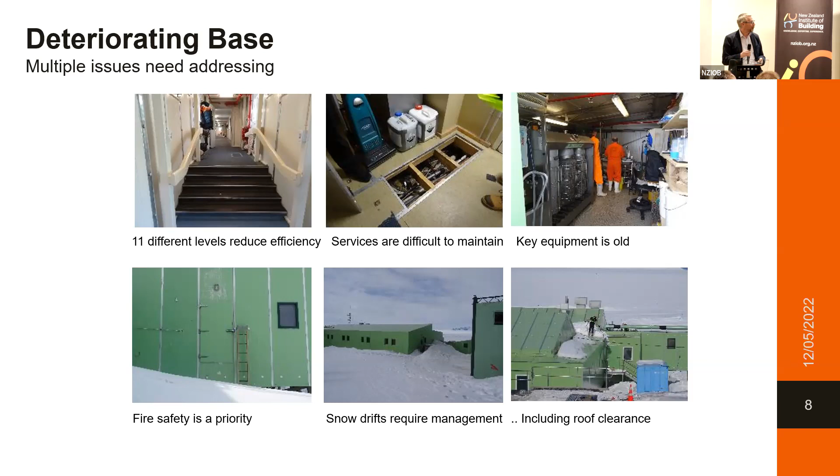And I'm going to hand over to Hugh now, who hopefully is going to be able to explain how he's designed that.

Thanks, John. What a pleasure it is to be amongst you all today. I flew in on Saturday, my first time back in New Zealand for just over 2 years. A lot of time on Zoom spent during those 2 years, and to be here actually in person with real people who are really going to build Scott Base is just totally awesome. Particularly great being here with John, Ian and Will, who are such incredible partners to this process.

The exciting bit's going to come a little bit later when Ian tells you how we're going to build it, and Will tells you what it's going to be built of. I'm just going to give you a quick architectural overview of how the building is arranged. As John has alluded, there's a lot of things go on at Scott Base.

A lot of science is carried out there. A lot of expeditions go out onto the ice. And it comes, despite being in Antarctica, with quite a number of significant challenges. In fact, you'd think, oh, well, Antarctica, there must be endless amounts of space in which you can build. There's actually quite a lot of restrictions around the current Scott Base.

For example, there's a road that leads from airfields to McMurdo Station, which pens in the site on one side. There's the sea on the other, which is frozen for most of the time, but defrosts sort of once every 2 or 3 years. And then there are long-term science experiments on the further side of this image. And then on the near side, there's staging areas for all the containers that are needed to bring in food and supplies and take out waste back to New Zealand. So actually the areas we have to build in are pretty restricted.

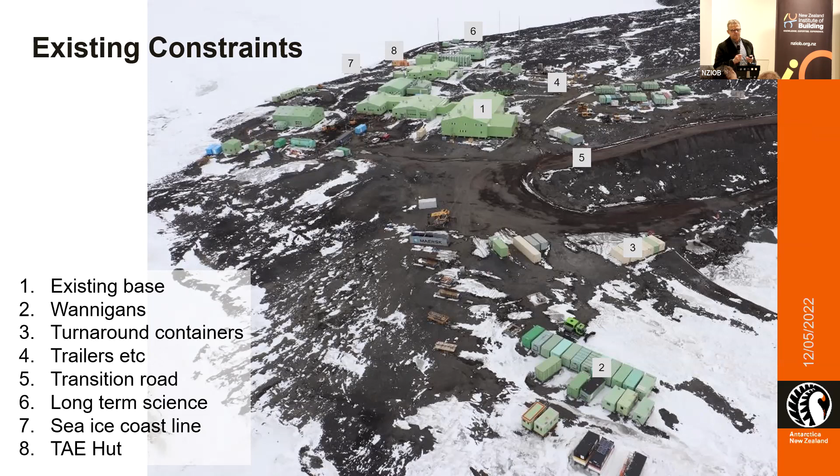Added to that, of course, there's an existing base, and we're looking to reuse that as accommodation, not only as we plan the building for the science teams who go out to Antarctica, but also for the construction team who will be building the new base. So, yep, in Antarctica, but almost like a city centre site.

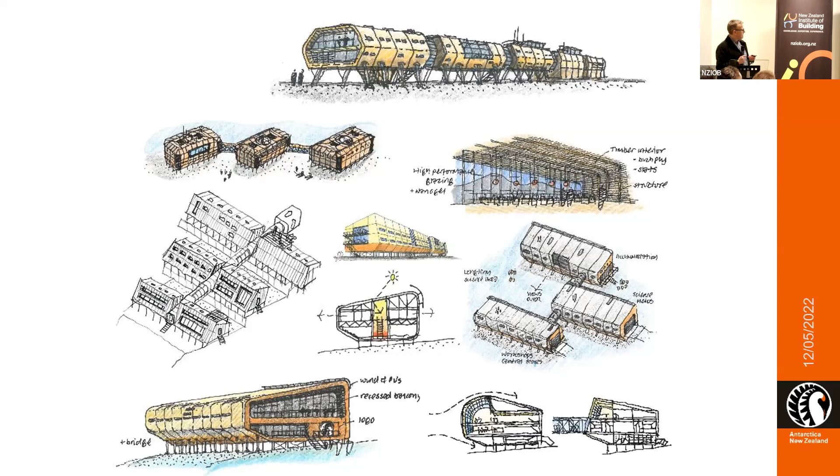So early on, we started coming up with concepts. Could the building be long and interconnected? Could it be a series of step buildings? And slowly, through a process of investigating different concepts, analyzing the benefits and disadvantages of each, we honed in on a solution which we've now been developing over the last 2 or 3 years. And the idea is really pretty simple.

Scott Base is located on Pram Point, where Sir Edmund Hillary established it in 1957. And it's a sloping site, sloping from Crater Hill down towards the sea. And because it's on that slope, we've utilized that in the design of the building. So there are 3 identical width buildings stepping down the slope of Pram Point and connected by bridges. So maintaining that concept of interconnection established by Hillary and reutilized in the buildings redeveloped in the 1980s, and which will also be a key feature of the new redevelopment.

So the upper building contains living accommodation, recreation and welcoming space. The middle building is the primary science facility. So that's where the scientists will be working, where there are labs, but also there's admin spaces and where all the expeditions are prepared for going out into the field. And the bottom building contains storage, workshops for looking after all the vehicles and so on that are needed to facilitate those expeditions.

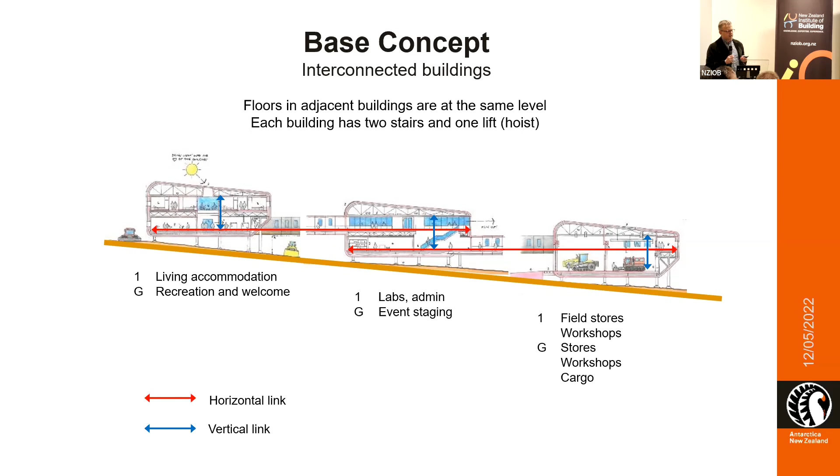They're connected by bridges so that the lower level of the upper building connects to the upper level of the middle building, and the lower level of the middle building connects to the upper level of the lower building. And then there are lifts and stairs making those connections, so the building becomes much easier to move equipment around compared to the 11 different levels of stairs which you find in the current base. And then with big zones for the distribution of services, again, addressing that issue which we have in the current Scott Base, where many of the services are reticulated in very tight zones that you need an army of 5-year-olds to help maintain.

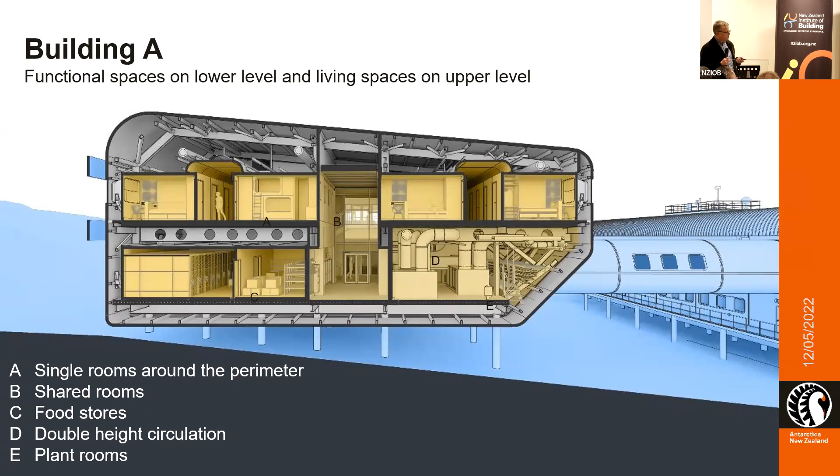So this is the entrance towards the building with the dining room up on the upper level so people can look out, engage with their incredible surroundings. As you come into the first building, which is the living and accommodation building, it's arranged around a kind of double height circulation space. So longer term residents have their own room looking out into the landscape. Short-term visitors, scientists going out into the field will share a room looking into this double height space. And on the lower level, that's where all the plant, food stores and so on are arranged. So quite a simple arrangement for carefully maintaining during the winter.

In terms of making the space seem as homely as possible, but also helping people cope with the effects of seasonal affective disorder, which is a big issue in the Antarctic in the winter darkness, we've employed a colour psychologist. We've been working with her recently, and she's developed a special Scott Base palette. And then we've been gently applying that through the building.

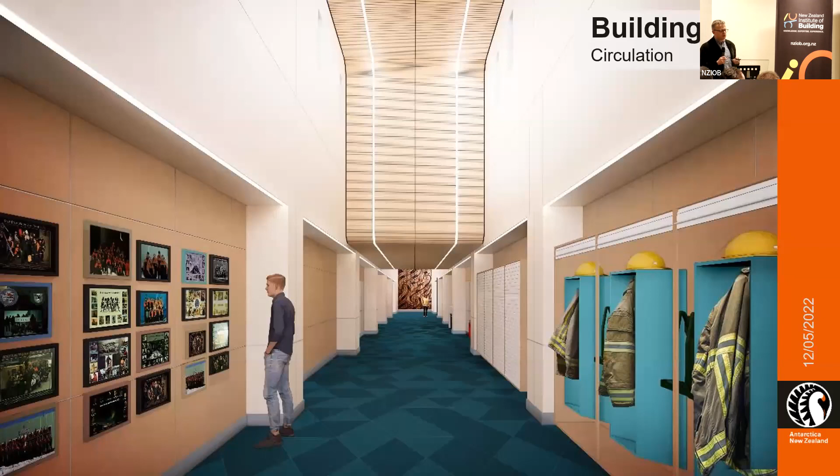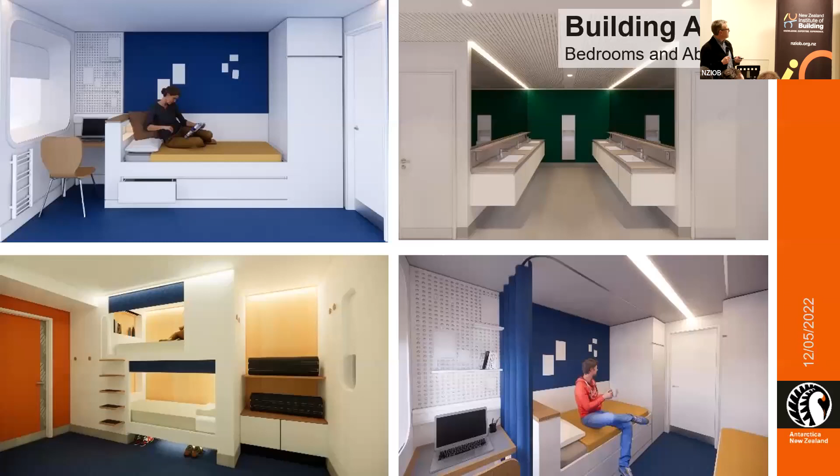So this is that double height circulation space. You can see photographs of all the winter teams on the left-hand side, and then some commissioned art piece at the end of that double height corridor, just again, giving that sense of place, which is going to be such a strong feature of the new Scott Base. And then just some of the other interior spaces, combinations of single rooms, twin rooms, quadruple rooms. You see the ablutions on the top right-hand there.

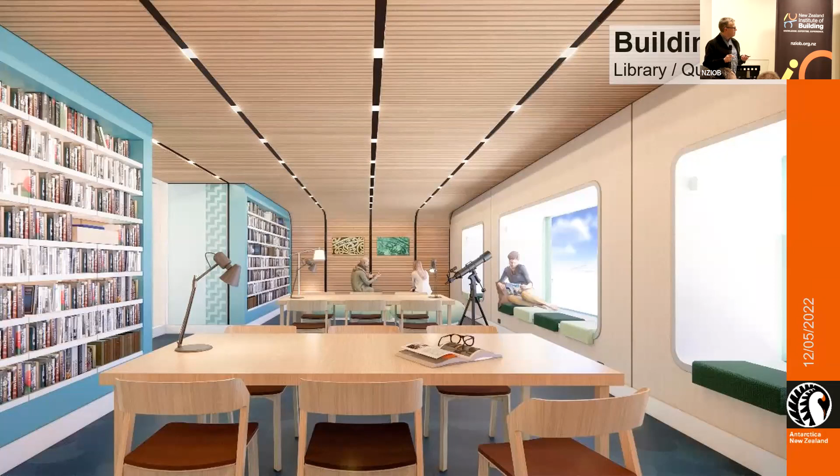And then this is a library at the far end of the upper level of that first living building with amazing views looking out over Mount Discovery. You know, really nice Southland Beech ceilings, quality furniture, books that come from Antarctica New Zealand's own collection, allowing people to constantly connect with their environment, as well as find out about some of the amazing science which has been conducted over the years at Scott Base.

Of course, no project would be safe without a little bit of value engineering. So with AECOM's great help, we've been going through that process recently. And I think one of the amazing things I found about this project is an incredible team. Antarctica New Zealand have done an amazing job at engendering a really strong team spirit. And, you know, I like to think, guys, I've made some lifelong friends through this process, which I think is something quite unusual, certainly in the construction industry in the UK. And it feels very special to be part of that on this project.

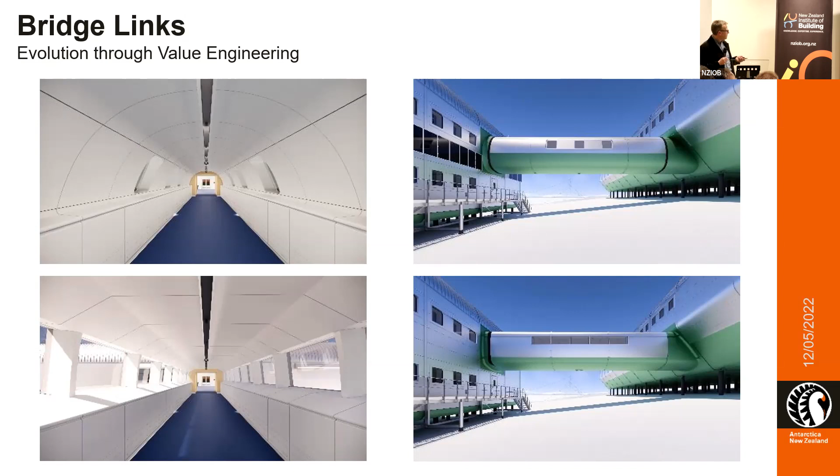And it's made things like this value engineering process so much easier to work through. And I think we've made some positive changes, which have also saved money through that process. One of which was just looking at our bridge link, which was a little complex in form, simplifying its shape, but then actually making it lighter and brighter in the process. The middle building is the one that's used for science. Again, flexibility is the key. Big open plan spaces to get expeditions ready, surrounded by cleaner spaces to calibrate things like electronics and other pieces of expensive experimental equipment.

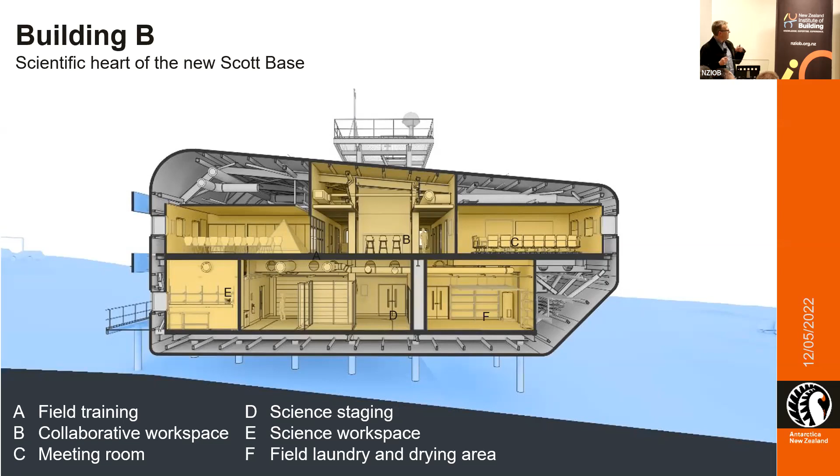Then with labs and open plan workspace on the upper level, and then a roof deck for people to put their experiments. And here you can see what that collaborative workspace would be like. And then the more industrial space for getting your expeditions ready at the lower level with cages, which can be reconfigured according to the size of the event, or the whole space can be open plan. It's all very regular shaped spaces with a repeating 6-meter grid, making it very flexible for future change.

And then down in the bottom building, building C, we're more into kind of workshops, storage. So you can see as a building, it's quite interesting because it ranges from sleeping accommodation, dining spaces and libraries, right the way through to vehicle workshops and wastewater treatment plants. So it's a sort of microcosm of a small community, I guess, with everything you need in order for people to survive through a long, harsh Antarctic winter.

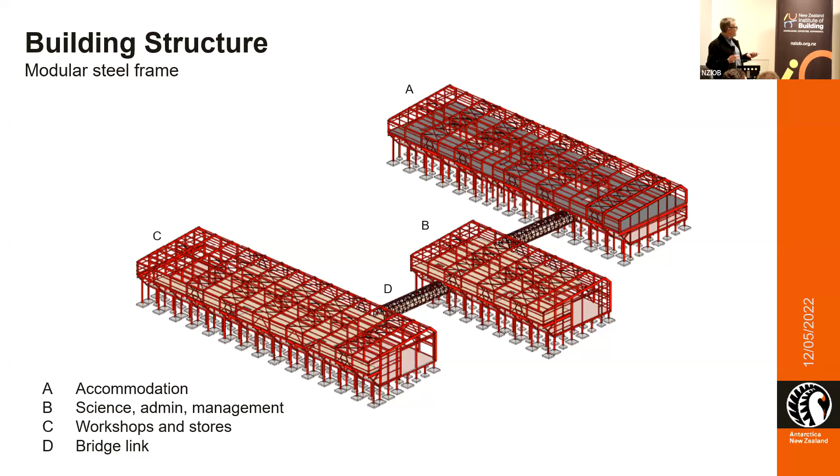And just finally, I thought I'd tell you about the cladding. Will's going to tell us about the structure, which is a repeating steel frame. Part of this project has involved really reaching out into the global community to find the absolute best expertise for ensuring that it's the design most fit for this extreme environment. So we went to Canada, for example, to look at how to minimize snow drifting around the base by elevating the buildings.

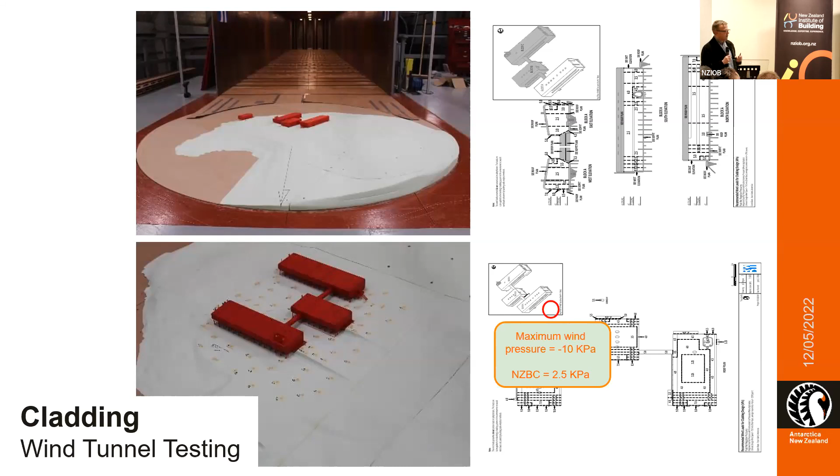We also went to some wind tunneling in the UK, where they built models of the building, put it through the wind tunnel, and we discovered that our maximum wind pressure is 10 kPa, induced by wind speeds of around 180 kilometers per hour. That's around 4 times more than is required to be withstood in the New Zealand building code. So you can tell in some places, this building is going to get an absolute hammering. So we really need to be careful in the way that we design that.

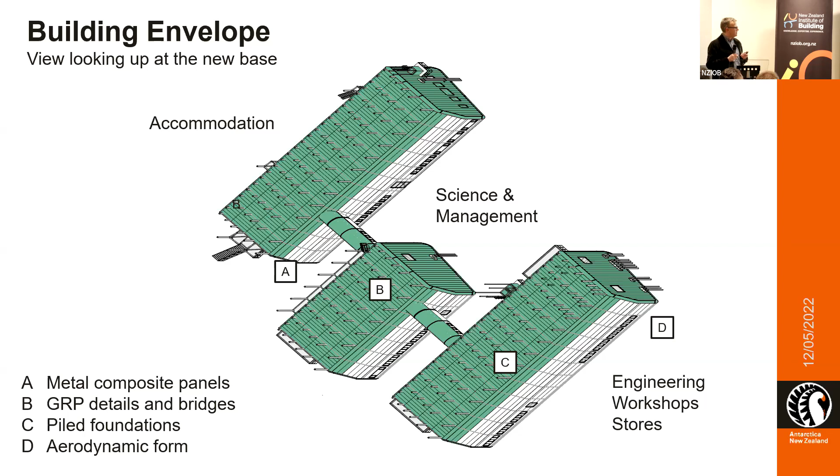Whoops, that's a bit of a weird image, slightly distorted, but looking up at it, what we're seeing here is a building largely clad in metal composite insulated panels, so a Kingspan type system, but then using high performance glass reinforced plastic details for those key points around the gable ends, which make sure that the wind pressures are not exerting too much of a force in the areas of highest pressure. So just helping to direct the wind around the building, keep the snowdrift down, and reduce the pressure on the building. So that's the architectural overview. How are we going to build it?

So this is pretty unique. In the planning of this, we looked at the traditional stick build method and thought it would take about 10 years by the time you have to containerize, build, and decommission. And aside from that, you would have needed a huge amount of people. And of course, there's not a great deal of accommodation at Scott Base. So that drove the methodology, which is a modular construction.

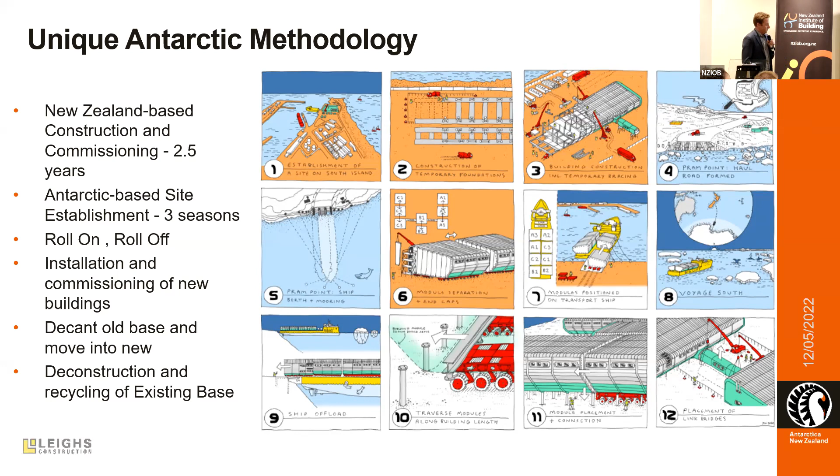So the Timaru construction, I'll call it standard. It's a reasonably complex building, as Hugh said. It's a small town, so it has everything you can imagine a town needs to run. Wastewater, reverse osmosis water production, fully reticulated services, quite a complex fire suppression system, and obviously bedrooms, kitchen, you name it, it's got it.

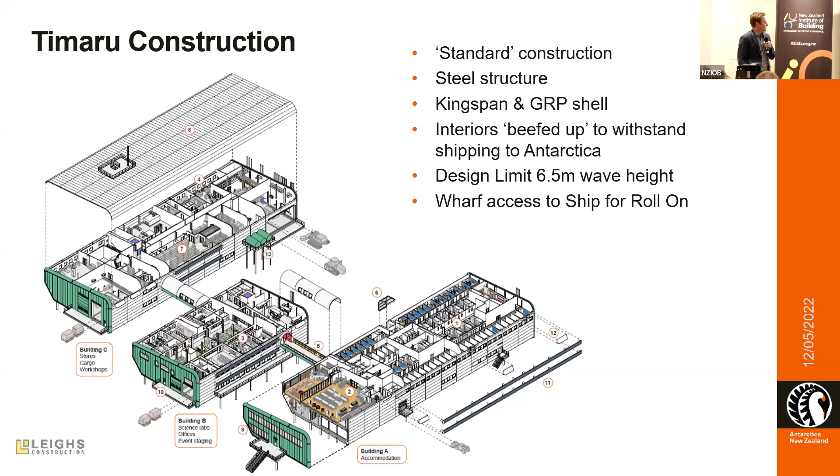We'll talk about the structure shortly, but it's a traditional build, but beefed up to withstand primarily the shipping case. So as it travels across the Southern Ocean, you can imagine there's going to be a lot of interesting forces at play on that structure. So we'll talk about that in detail after me. So a part of the Timaru-based construction is accessing a ship for the modular transportation. So the construction of a roll-on structure is required to do that.

So in parallel to the build in Timaru, there is about 3 years of site preparation to prepare the site ready to receive the modules. So part of this is obviously bulk earthworks. There's about 65,000 cubes of material, and we're balancing that out on the site so there's no material removed. Transition road, so, oops, damn it.

Temporary wharf and bollard construction. So we need to build a structure to receive the ship when it arrives, and that's a roll-on, roll-off structure. Quite a lot of bathymetry around, obviously making sure that the ship can actually get into that site. There's no underwater blasting allowed down there, so it'll be quite a complex piece of work to design that structure. And all through this, we've got to maintain current operations at Scott Base. So the staging aspect of this is pretty complex.

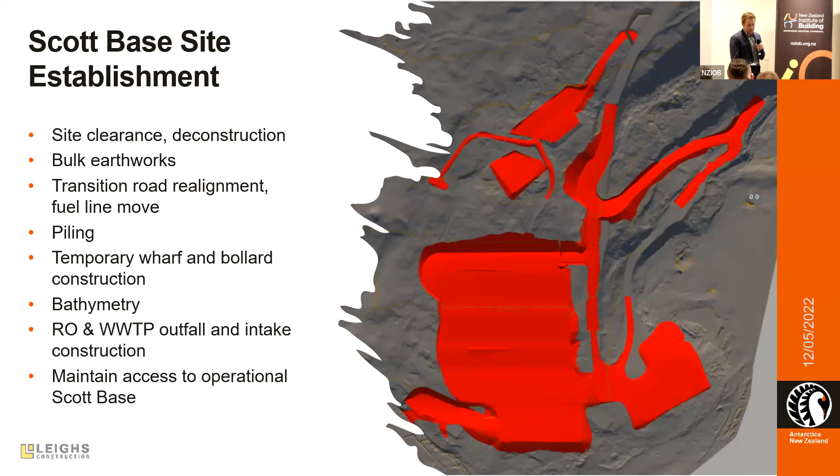The site access and mooring at Scott Base, as I mentioned, is quite a complex piece of work to make sure that the ship can obviously be kept fast in that position while the modules are rolled off. And amongst that, we've got sea ice. We'll talk about that in a little bit more detail later. And the Southern Ocean, the voyage. So as you know, the Southern Ocean is a wild stretch of water. And as such, there's been quite a lot of work done to model the movements of the ship. And we've used a lot of historic weather forecasting and information to backcast what the sea state may be at that time of year.

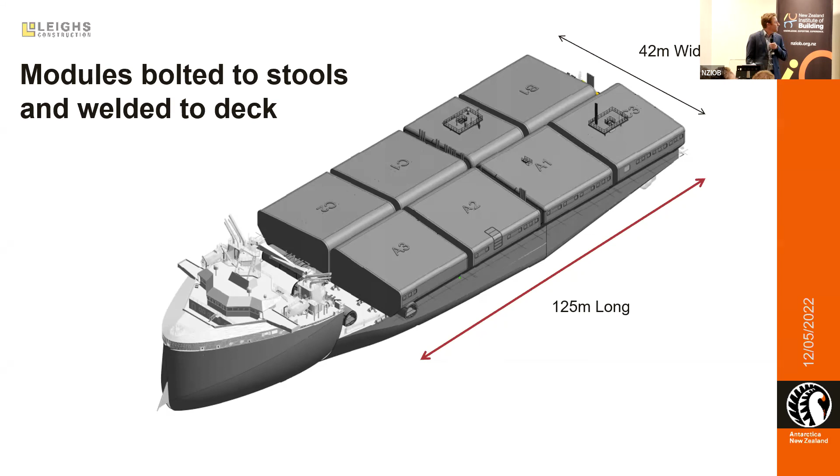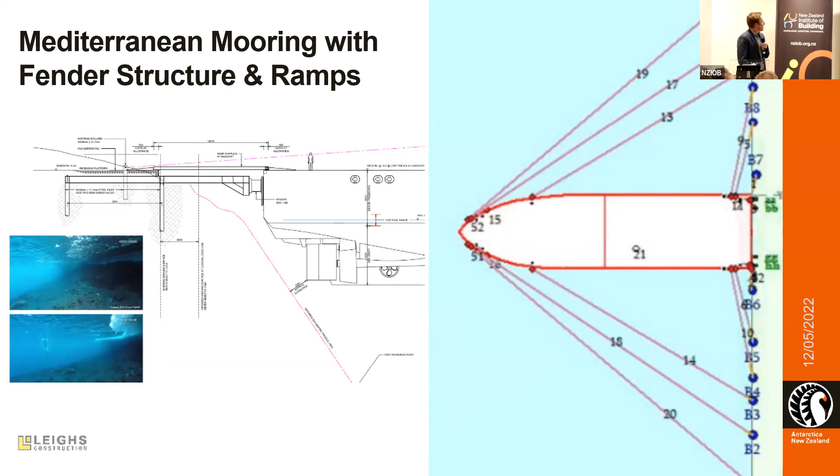So ice breaking is another piece of this puzzle. In order to get to Scott Base in the middle of summer, the sea ice is still there. So you need an icebreaker to break a channel, sometimes as long as 50 kilometres from the ice edge, depending on the sea ice conditions. But not only that, we can only arrive after a certain date. So the Weddell seal population happen to have a wonderful nursery right outside Scott Base. So we cannot, obviously, get an icebreaker in there until the pups are able to get out of the way, essentially. So that limits the arrival date. The sea ice conditions obviously dictate how long the breaker will need to break the channel.

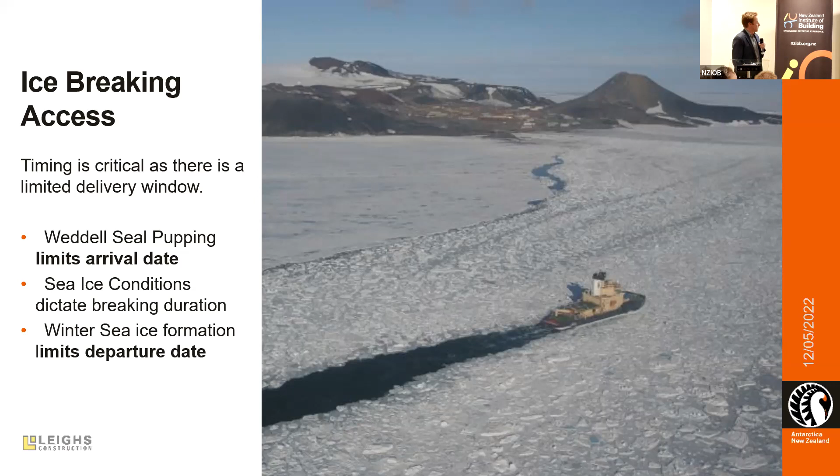So the modules in themselves are not that heavy, but they're obviously bulky. We've got quite a precise loading sequence, how we load them onto the vessel in order, obviously, to get them off in the right order. And the positioning on the piles, I think the next slide, no, it doesn't, it's later on. The positioning of the piles on which to place the modules is a precise piece of work as well.

So we're modelling about 1 module per day off the ship. It's a walking pace. It's on about a 9% grade. I think it's the steepest that these machines will go up. We've got a bunch of winch blocks as well to make sure that there's no issues for traction. So it's a really interesting piece of the project.

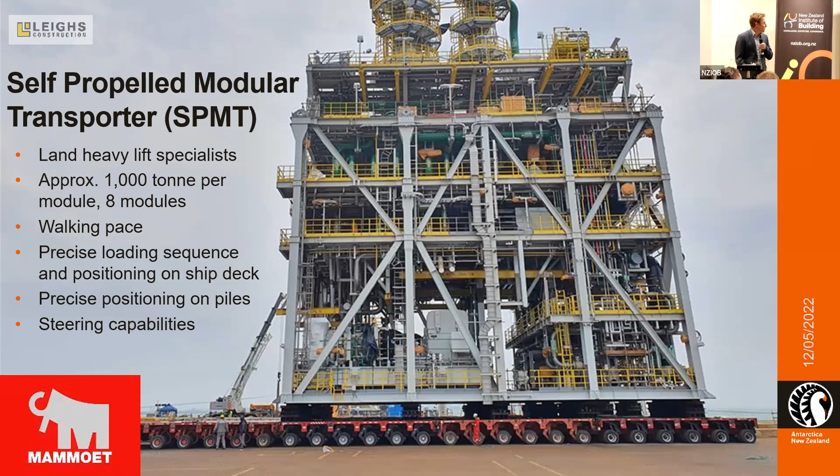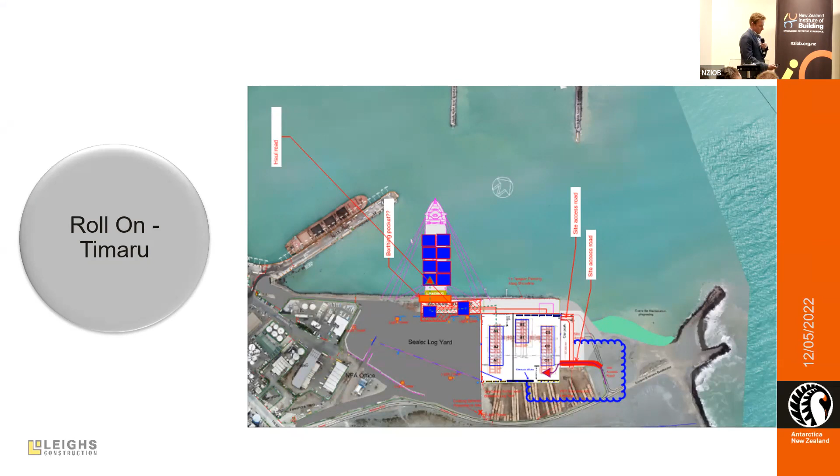Scott Base roll-off, a little more complex given the topography. So there's a lot of civil construction, ramps and access roads to be built to make sure that the tolerances of the SPMTs, the modular transporters, are not breached. They can move about 300 mil up, 300 mil down, so 600 mil of each axle on those trailers, independent

movement. So it's a pretty fine and precise activity, particularly where you've got transitions where the buildings start to move up the slope. You'll have the front of the buildings going up the slope while the rest is still trailing along behind. So some pretty interesting calcs going on there.

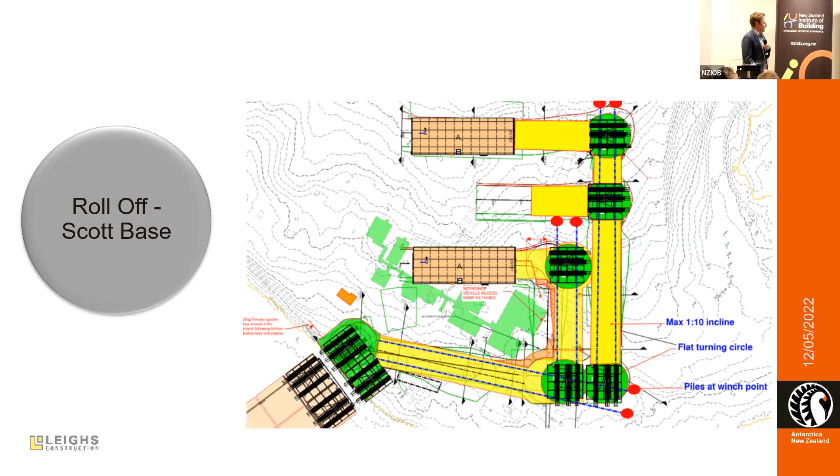Yeah, this just shows the methodology for positioning the modules. So we'll have pre-piled, I think there's about 300. I can't remember the diameter of the piles, Will? 410 piles, and they're iced in. So the old Antarctic cement, you drill the hole, you put the pile in, then you pour water in and leave it to freeze. It's simple as that.

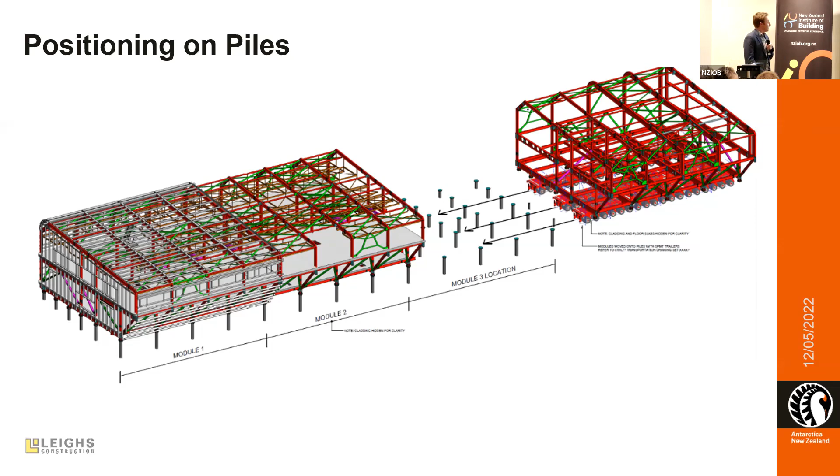So essentially the pile lines are in, and we'll build a ramp system underneath the piles to bring the modules up to the right level, drive over the top, and then lower the modules down onto the piles. Sounds really easy. I'll move on from there. So I thought I'd talk a little bit about the unique challenges. Obviously construction in itself is challenging at the moment, let alone the unique Antarctic specific ones that we'll be dealing with.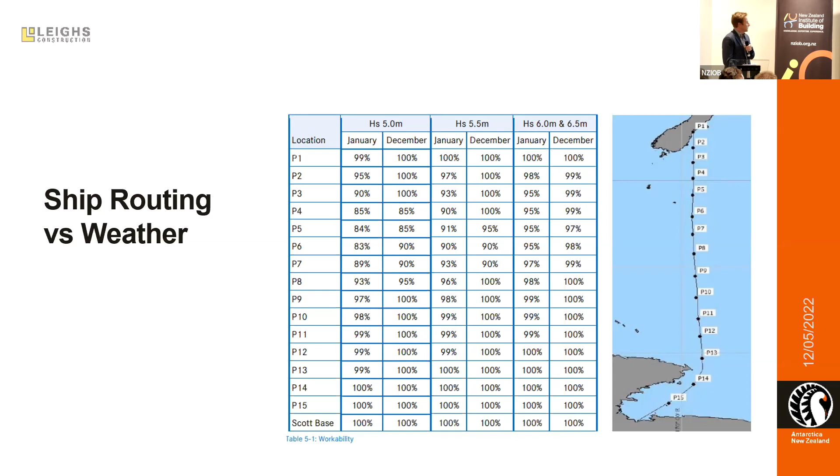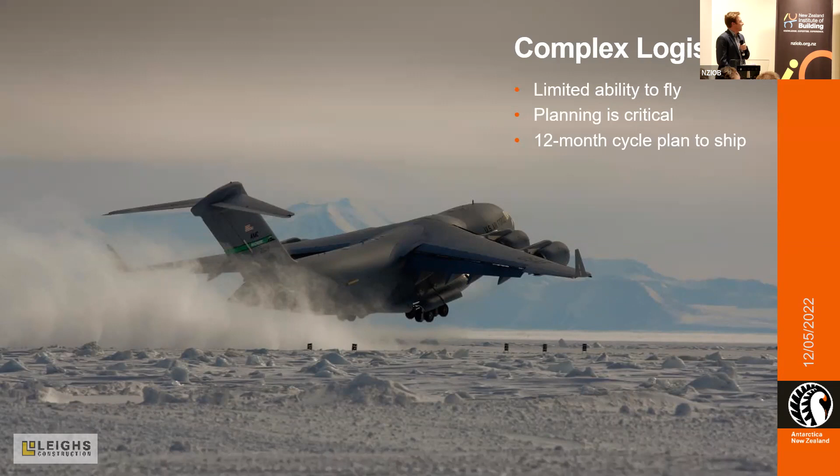The logistics. So I think this project's probably 50% logistics, maybe even more. It's complicated. There's shipping and airlift capacity. The airlift is limited ability, and of course, it's fairly intensive on the carbon. So we're trying to maximise the shipping utilisation. So there's a 12-month cycle for the ship, one ship a year. So if you miss the ship, you miss a year.

And I think that's a very important thing when you're planning to get your head around: if we don't have gear on the ship this year, it won't be there next year. So you have to have everything planned a year in advance. Otherwise, you have to rely on the big beast, the C-17. They're an amazing aircraft. That's a 40-foot high top container with about 30 tonne in it. So they're an amazing aircraft if you do have to get something down there in a hurry. But the ship is obviously the primary.

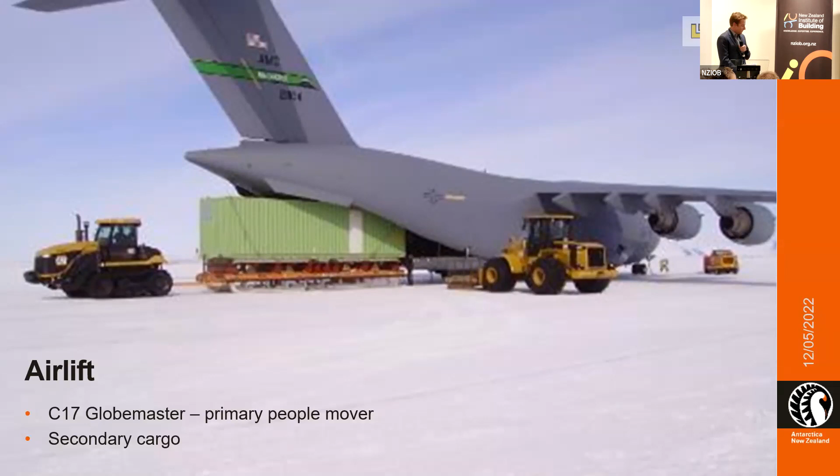Construction season is limited by the weather, but also the darkness. So mid-October to about February is our construction season down there, about four and a bit months. During that time you've got 24-hour daylight, so there's a bit of flex in the system. If you get behind, you can catch up in the daylight. But once about April comes, it's all over, you've got no light. So the construction season has absolute hard dates around it. Getting work done in a specific season is critical, because if you don't get it done that season, you're not going to get it done until the next season, 12 months later.

We've talked a bit about the site work staging, but the base is still planning to deliver a full science program whilst the works are going on. So there's a lot of interaction with helicopters, Hägglunds, and all sorts of plant and people in and around the site. There's a heck of a lot of work going into staging the construction works, particularly when we're building the ramps for the modular transporters.

So we have to keep the base access open at all times. Operating temperatures, yeah it is a cold place. The weather in summer can actually be reasonably benign, we get long periods of pretty overcast conditions, sort of minus 5, minus 10. So it's actually pretty good most of the time for two and a half months.

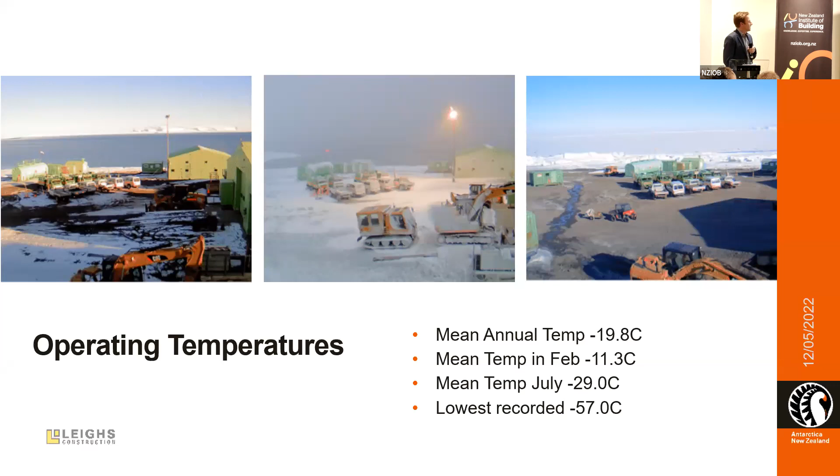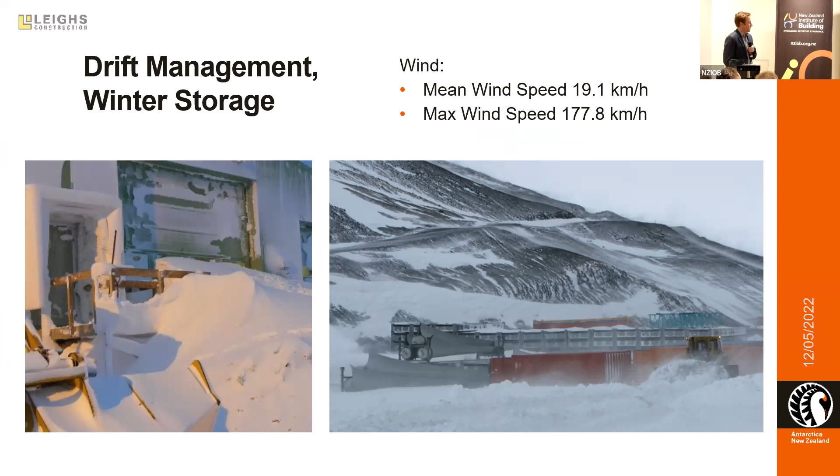But ultimately, it took the side out with a lot of stuff in it. We had an issue one year when a container with a soft top on it ripped completely off in the winter, and the spindrift packed like tight polystyrene into a wind turbine nacelle. It was three or four days of careful scraping of the snow to get it out of this container. So it's very important that we manage that winter storage.

So yeah, I've talked about the climate, but part of that is not just the cold, but the UV. Intense UV, so sunburn, dehydration, and so on are very big risks down there.

Marine offload, we talked about that, that's a reasonably high risk venture. Sea ice and snow, pretty obvious. But the remoteness, that really plays a part in managing people. When you're down there, your connectivity is extremely limited. You can't just get on the Google or internet. There are facilities to do that, but we have to manage it carefully.

Circadian rhythms are also a major issue. Some people, with 24 hours of daylight, their sleep just goes completely out the window. After a week of walking around the base in the middle of the night, people get pretty grumpy, so that has to be really managed well. And some people can handle it and some not so well.

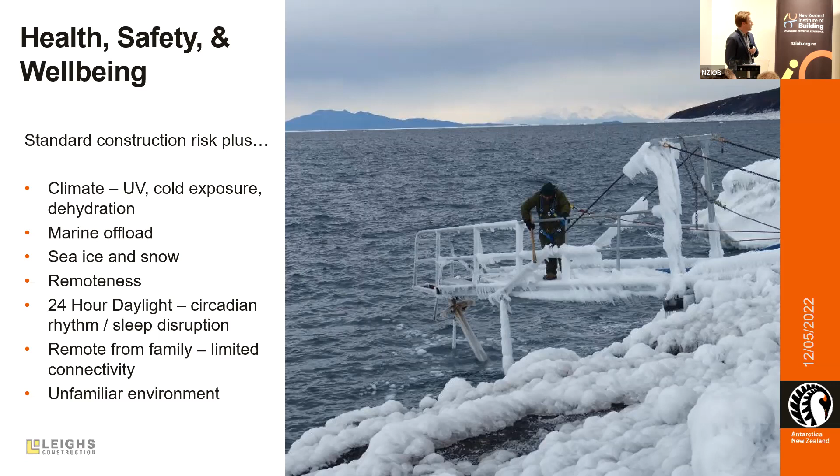The remoteness from family, you're talking three to four months for some people, so it's a long time to be away from friends and family. And the unfamiliarity of the environment, it's a strange place. It grows on you after a few months, but when you're there at first, for the first few weeks, it's a very odd place to be, and it takes quite a bit of adjusting. We want guys to get there, get on site and crack into it just like you do here, but we have to develop some mitigations and assistance to help them do that.

Cold weather, obviously PPE is critical. Dexterity, so glove use, some people's tolerances to the cold are different to others, but design is a key there, designing systems that can be done with, say, tightening whatever with gloves. Even simple things like goggle fogging are an issue, your visibility can be impaired, and suddenly you're tripping over and whatnot.

Moisture management also - you can get warm, you sweat, and then if you're not layering properly or delayering, you can get very cold very quickly. So there's a whole bunch of mitigations around that: warm up facilities, increased calorie intake. This food's bloody good down there, so there's typically no issue there, but it's a real thing. You've got to keep hot, regular food into the guys working outside.

There's a lot of systems around buddy management, but frost injury monitoring is a very important piece of this - frostbite and frost nip. Once you get frostbite, your tissues died, so it's not a good thing. It's to be avoided.

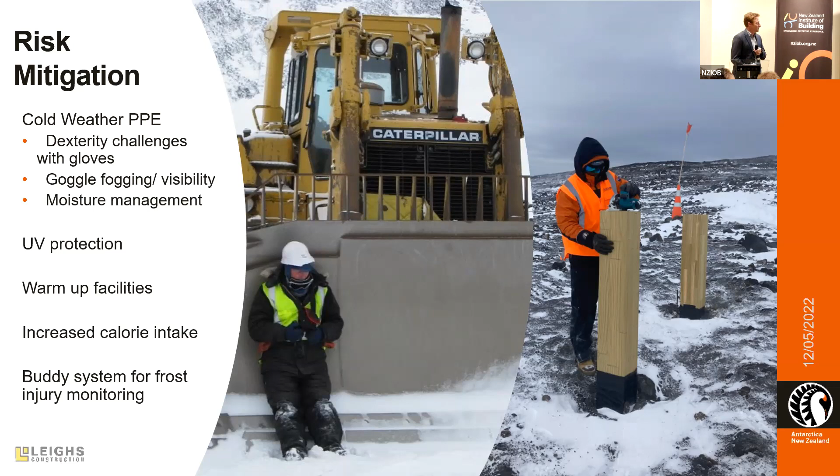Finally, but not least of all, environmental management. As you can imagine, extremely strict protocols, rules, regulations around environmental management, waste handling - every time something blows away on the ice, it's an incident report. So you can be filling out a lot of paper if you're getting it wrong, and you don't want it to be, obviously, either.

Wildlife - we've had Adelie and emperor penguins totter onto the site, and once they're on site, you can't move them, you've got to leave them. So prevention of that happening in the first instance is really important. So that's all I had.

There was one slide which hasn't made the cut, but I'd like to read it out just to give you a sense of the history and the early days of what they dealt with. This is from a guy named Apsley Cherry-Garrard, who wrote a book, a great read, The Worst Journey in the World.

We stood panting with our backs against the mountainous mass of frozen gear, which was our load. There was no wind, at any rate, no more than light airs. Our breath crackled as it froze. There was no unnecessary conversation. I don't know why our tongues never got frozen, but all my teeth, the nerves of which had been killed, split to pieces.

So hopefully that won't happen, but that was a winter trip - we won't be doing any of those. Anyway, I'll hand you over now to Will, who's going to talk about the tricky stuff.

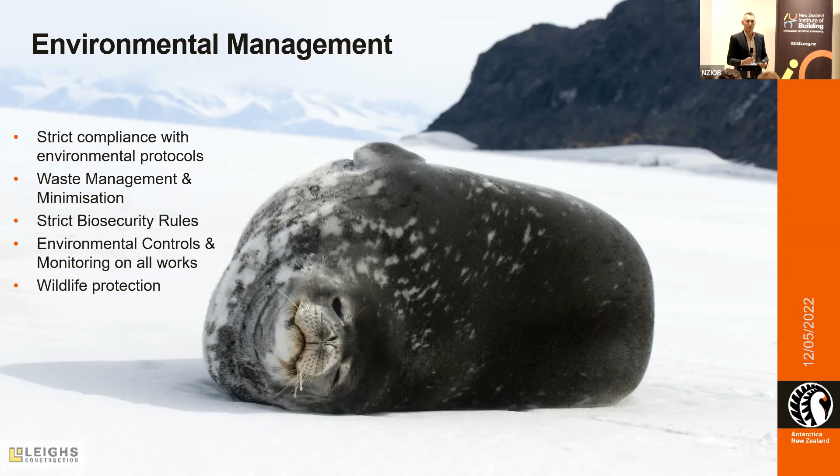From the marae visit, and also just talking about getting to know each other and becoming friends - when we got together to do the charter at the end of 2017, I ended up in a bunk room with Ian, which was a good experience. And then when I went to Antarctica New Zealand when it got based with Hugh, I ended up sharing a bunk - I think I was on the top and he was on the bottom. So it's different to a normal project, and you do have those opportunities to build that connection. I think it has made a real difference, and it's paying off now because there's a lot of challenges. That makes it really interesting too.

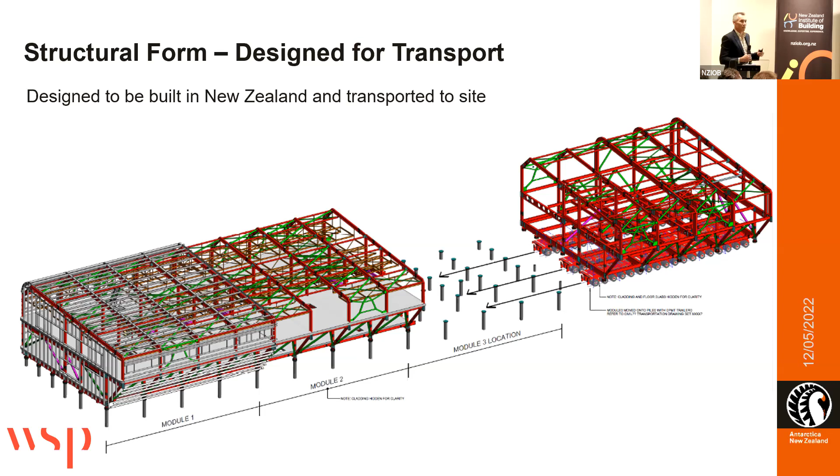I'm going to talk on behalf of the WSP team - Civil, Structural and Geotech - because it's the hard work of everybody that really makes it possible. I thought it was good Ian went first, because when Leighs got involved in the early contractor stage, it meant we had to relook at the design. We kept the same modular system that Hugh talked about, but building it meant we basically redesigned it to be built that way. That's been really interesting, and it's been a team effort too. Ian showed this slide, but the key point is it's really designed to be built this way. So that has changed the design.

So what's kind of normal and different about this project? It's kind of obvious, but it's good to think about it too. What are the loads? They're not defined in the same way as a normal building - you've got to think about them. What's the wind? It's a special study, not something that's just in the standard. Environmental conditions have been mentioned, but you've got to think about that.

What can you do outside? When Ian said let's not have any bolts that are too small and fiddly with structural engineers, he said good, you want big bolts here, no problem, we have big bolts. But like all your products, you've got to go to more rigor to make sure they're going to do the job that they need to do in that environment.

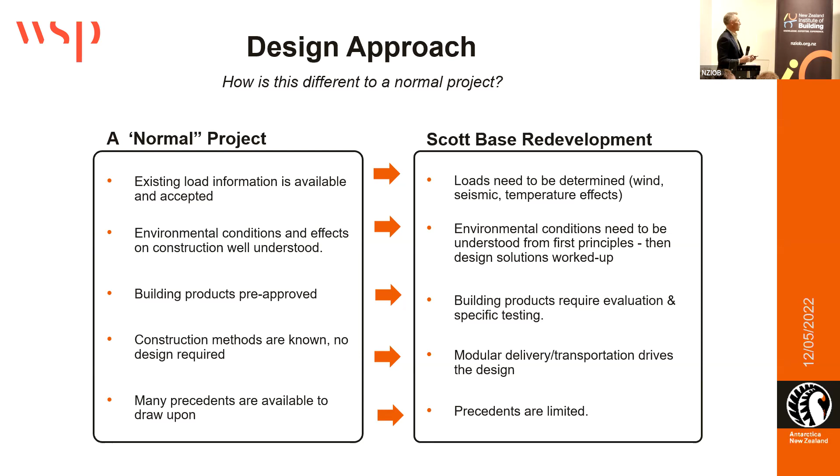So what is the building? Just to go through some basics, it's an IL4 facility, and obviously it's got to be post-disaster. When you're thinking about fire, you can't just get people outside because you can't necessarily escape outside - it could be a condition 1 storm. So you've got to think about refuges and firefighting or containing within the building.

The main difference was we understood pretty early that wind was going to be critically important, probably more than seismic. So we brought in this damage control limit state to really make sure that we got the performance we wanted in the relatively high winds you get frequently.

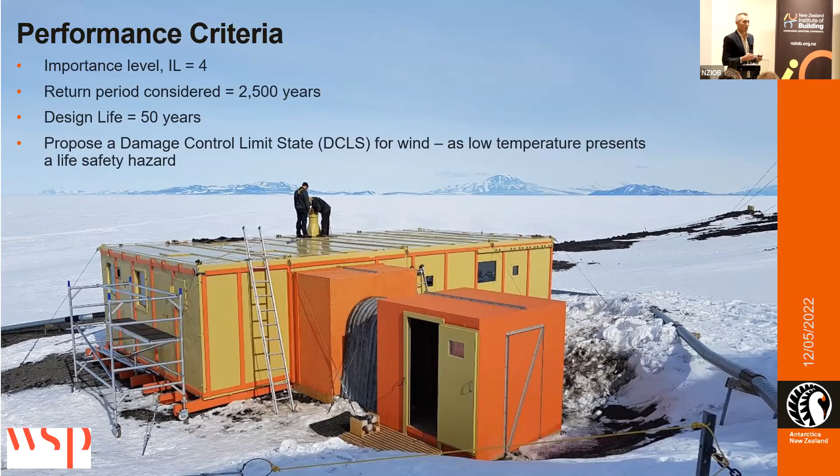Just to talk about the other natural hazards, because this is kind of interesting - I think it's a little bit different to normal. There was some talk about tsunami, since this thing is quite near the shore. Antarctica New Zealand engaged GNS to do a study, and they found that a big central American earthquake could generate quite a significant tsunami, and that could actually run up to the 8-meter contour at Scott Base. That's pretty close to the existing base, so that was one of the reasons we made sure the facilities are a little bit higher.

In terms of seismic, it's pretty low. But the interesting thing was GNS said, well, we don't really have any records, so we don't really know what the seismicity is. They found some plates that were fairly similar in Germany, and that's how they figured out what the seismic activity could be, which might sound a bit random. There are ice quakes as well, but they're not the size that would really bother the building.

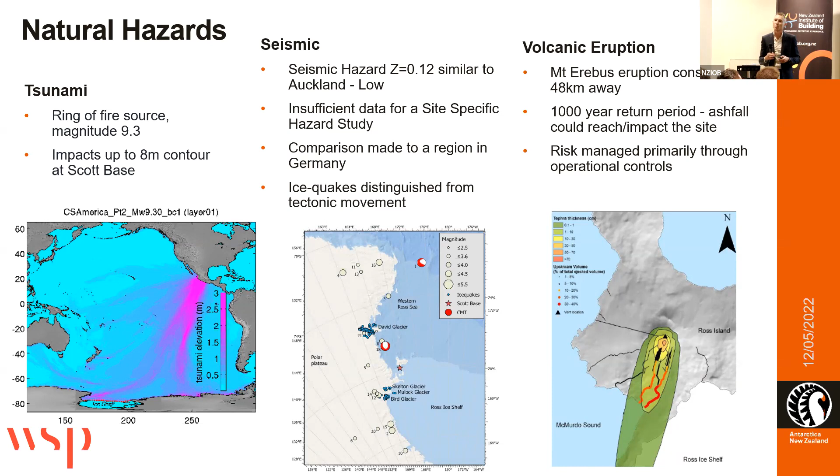Then volcanic eruption, that's quite interesting - Mount Erebus, which is pretty well known, is about 48 k's away. Ash clouds - what could that do? That could drift down to the base, but again, it didn't affect the structure. It was something we had to think about in terms of ash on the roof and water supply, all that sort of thing.

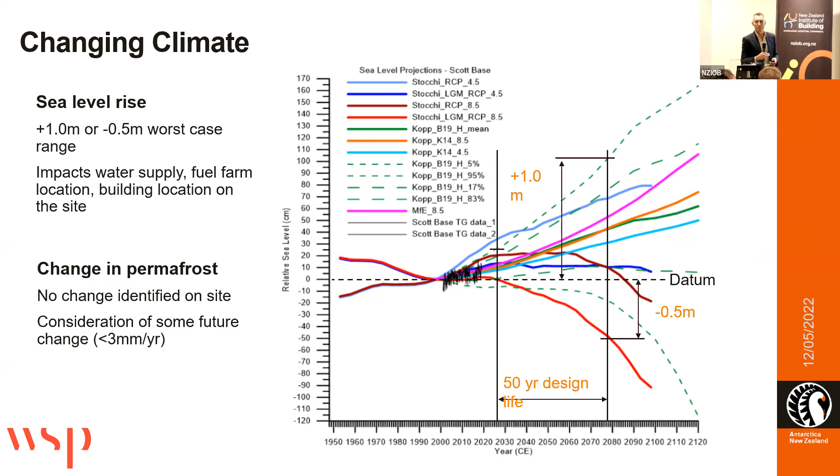Sea level rise was pretty interesting too, trying to predict what would happen in the future climate, knowing that climate change is a big factor. Some of you will know that at the poles, when the ice sheet contracts, it actually reduces the gravitational attraction at the pole, so the sea level can actually go down locally, even though it's going up in the rest of the world. That's why you can see the line kind of dropping there as one prediction, but it's also predicted to go up - so somewhere in the middle is the effect, and we've made an allowance for that. Obviously the change in the permafrost was something we looked at too, I'll get into that in a minute.

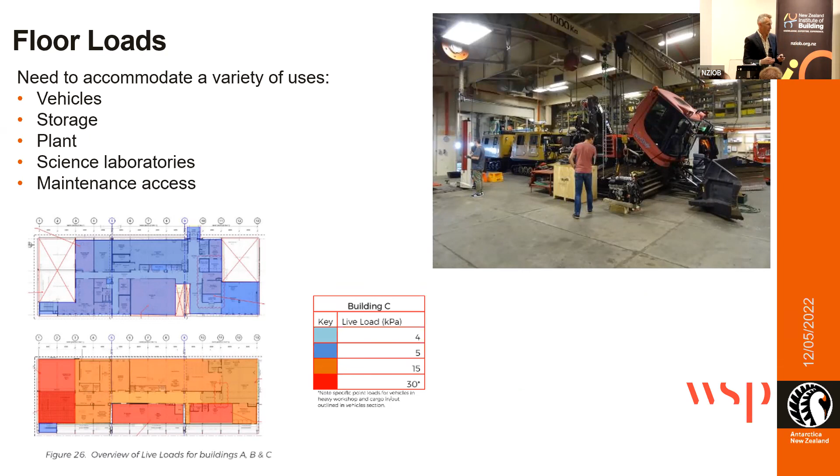What's different to normal, as you've heard, is there's everything in the building including vehicles - quite heavy bulldozers that are being maintained - but there's also water tanks and wastewater treatment plants. In the table there, the heaviest floor loads are 30 kPa. For an office, you're normally at 3 kPa - like 3 fairly big people in a square meter - so this is like 30. It's a significant demand on the building. Then looking at how we handle the transportation and what we do.

So I guess what we've done is a combination of the structure we had before, and then a combination of beefing it up permanently. So some sections that are bigger to handle the transportation demands on the structure, and also some temporary braces that we can take out afterwards once we get down there.

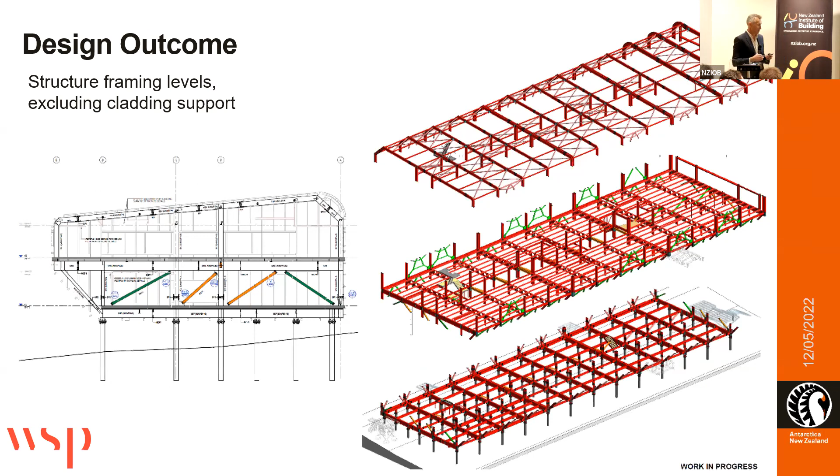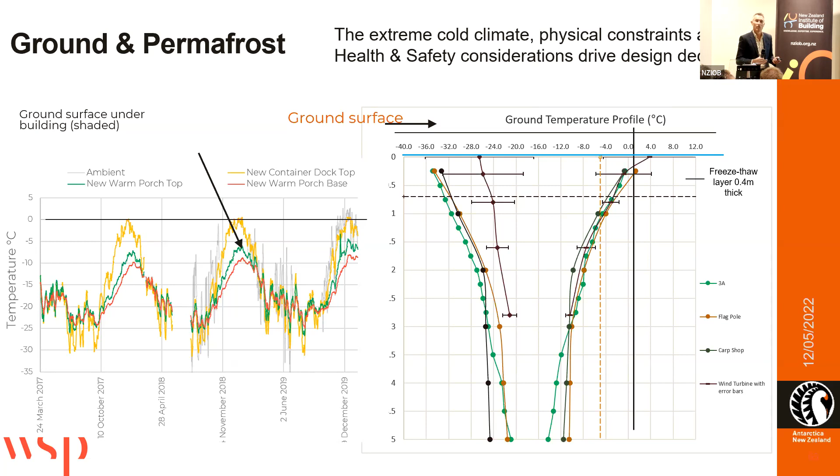But then if you look at it as a sort of a depth profile, in the summer, you can see it comes up here to sort of above 0. And down here, it stays at about -12. And in the winter, it's pretty cold still down here, -24, but it's much colder at the surface. So you've got quite a lot of change in ground temperature at the surface. So you just got to think about that in terms of where you put your foundations and the impact that'll have on any foundation.

So we've decided on a piled solution. There's a few reasons for that, but it works particularly well with the delivery methodology, because it's a lot easier to roll your building over the piles than over pads. Pads have been done before, but the real advantage of this is that the buildings that we're putting on are actually a lot heavier and more substantial than the existing buildings. So we get a lot more capacity out of this.

Oh yeah, just go back to that one, sorry. The other thing is that because it's Antarctica and environmental is incredibly important, they're designed to be removable. And during the test, we did do that, took the lid off and stuck a big Herman Nelson heater on it. And we'd done some modeling of how long that would take to melt the water, and it was pretty much bang on. So that was kind of encouraging. So you can just pop it out of the ground when you're building your new Scott Base, hopefully in at least 50 years, but maybe a lot longer.

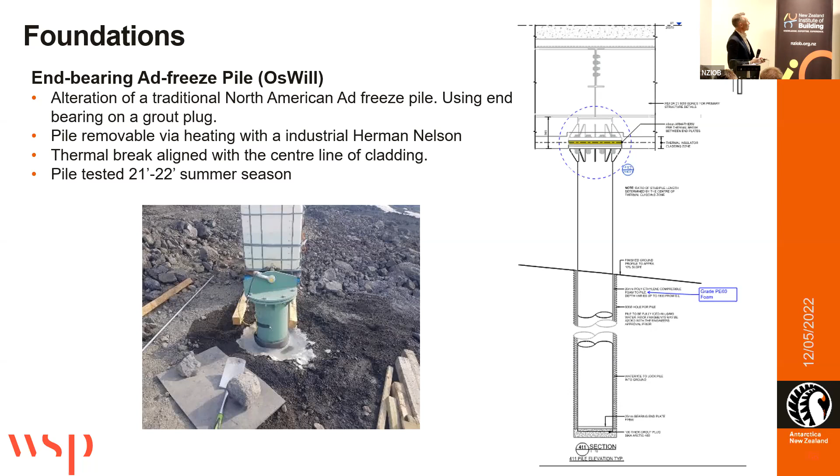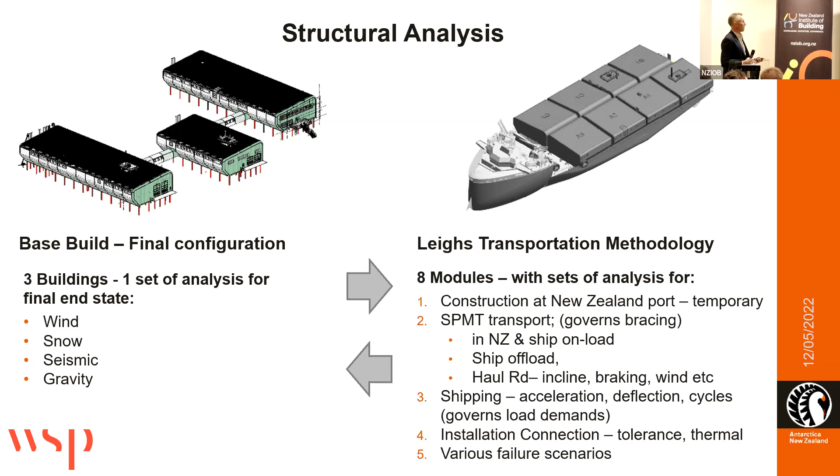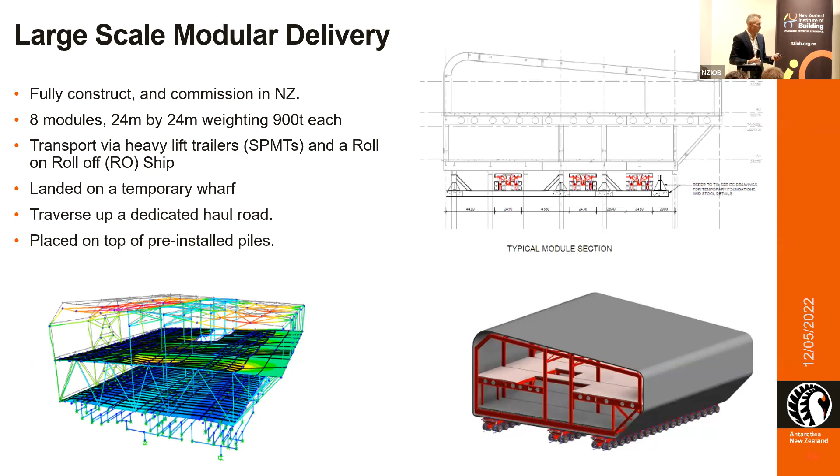So this just shows you a model of the building, and essentially because it's sitting on these trailers that are hydraulic and they're all linked, it's kind of like putting the building on a waterbed. So it just wants to move with the building, and that means that the building has to be stiff enough to resist that deformation. And each module weighs about 900 tons, so it's pretty heavy, 24 meters by 24 meters. So a fairly big, heavy chunk of building. And I think Ian's mentioned the rest. We've got the 3 strings of SPMTs there sitting underneath.

And it sounds a lot, sort of plus or minus 300, but when you've got a 1 in 10 slope and flat areas that you've got to get onto and then up off again, that is actually quite constrained on the site. So yeah, it's a good challenge.

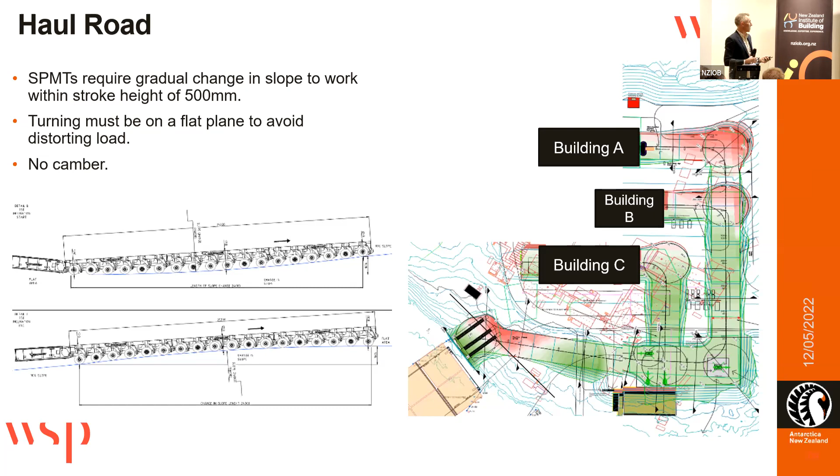All right, so just to look at the shipping case, and I won't spend too long on this, but it is quite involved in terms of understanding the accelerations that you get. You can get that information based on the ship type. But of course, there's limited data for the Southern Ocean because not a lot of people do this sort of shipping down there. So we've had to sort of derive some of that and use this design code that we've come up with.

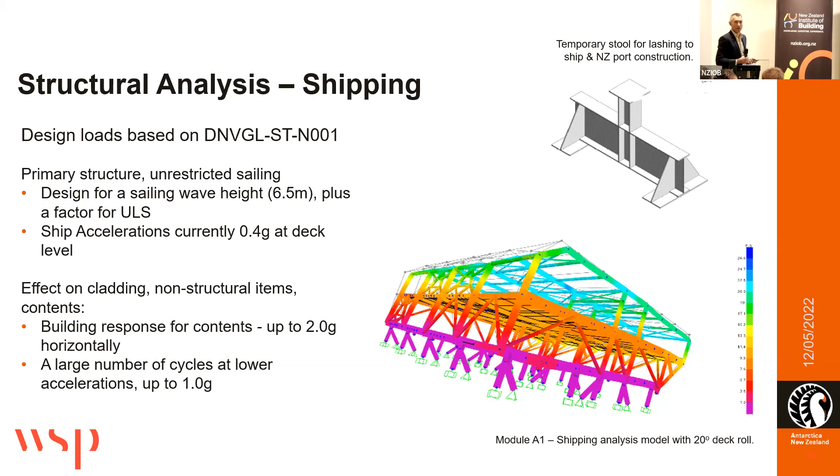And we've also looked at more like the 6.5 meter wave height, because we're going to get potentially hundreds of thousands of cycles. So it's kind of like it's got a fatigue effect on the building as well. So I've had to look at a lower level of seismic, which effectively is a heck of a lot of load repetition. So things you don't normally get into when you're designing a building, but really important to make sure that we get the performance we need, and for instance, we don't get down there and find a problem. So thinking about all this stuff ahead of time is the key.

Steel, if you get your grades right, can handle some lower temperatures. You'll see most of our steel's tucked within the insulated envelope, so we don't have to think about the extreme cold down to -60, but the piles definitely we need to think about.

Timber, it would be a great material, but it shrinks a lot because the humidity is incredibly low down there. So yeah, there's been an issue, for instance, down at Scott Base with fire doors, because the timber doors were taken down and then they shrink and then they don't meet the minimum clearances for a fire door. So it's something that we thought about, but in the end, we haven't gone down the timber route.

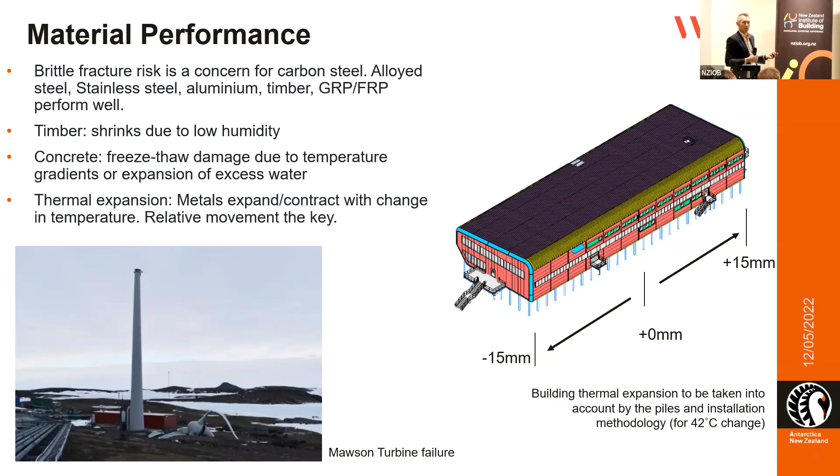Concrete, you need to think about your mix design because of freeze thaw, but you can do it. But obviously, you don't want to be pouring concrete down there because everything's so cold, pretty difficult. And thermal expansion, again, that sort of temperature change in the ground that we talked about, we've got the same thing, which I'll show perhaps in a bit more detail on the next slide.

What we talked about, just pouring water and freezing all the piles and job done, cantilevering piles, that sounds all good. But what, of course, would happen if we did all that in one go and then the building got cold? We'd actually have a differential movement of 30 mil, and that would almost be enough to yield the piles. So what we actually have to do is have a sequence for icing up the piles so that basically they can move while the building shrinks, and then we ice them up. So all that stuff's been thought through.

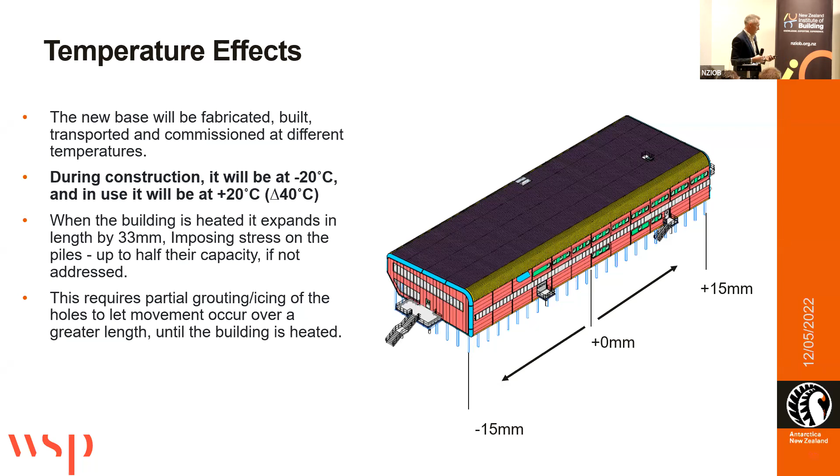And then just how we basically bring the modules together on site. This is an absolutely joined up effort with the building services engineers and the Leighs team. So we've got locating pins on the piles, and we've also got these locating pins around the perimeter of the frame to lock the frames together. And then we've also got concrete, which are not in situ floors because we're casting them in Timaru, but they need to be locked together to give the structure its integrity as well. So that's kind of how we do it. And yeah, it's been a fascinating journey.

So that's my last slide. So I'll hand back to John just to finish this off.

Right, simple as, eh?

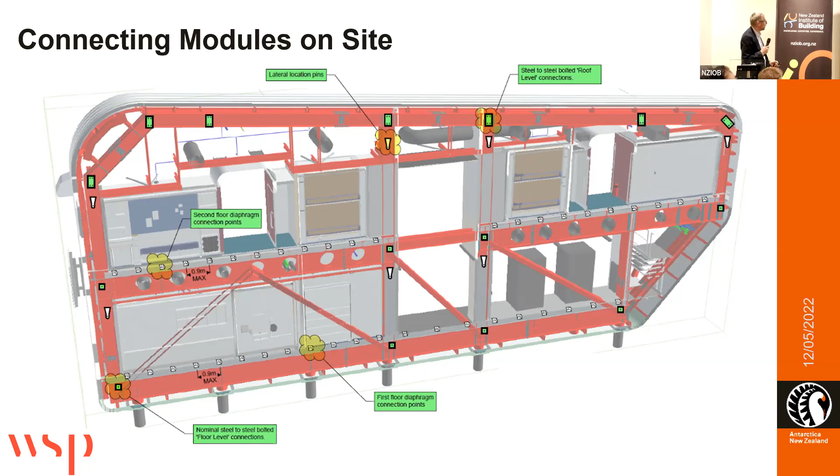So we're on the journey now. It's been going a while. And obviously the team were incredibly lucky to get funding last year. Given all the other challenges across the nation, across the globe, I think that's quite amazing. So we're on the journey.

We had an early contractor engagement, pre-construction services agreement with Leighs to get us through doing some preparatory work for last season. So we've got our long-term science cabins and things already in, and we're working those through. Same again for this season. And then we look to go into full construction at some point early-ish into next year. We've got a little bit more time to spare though, which is quite good news.

So the long pole in the tent has been the certainty around when we want to ship the modules south. And I'm pleased to report that we have, through our main board approval and the Leighs board approval as well, agreed that we will commit to the big lift contract. So we're in the process of taking that forward right now. And we're committing to a shipping date at the end of 2026 and beginning of 2027.

So the 26-27 season. So that'll see the shipping and the modules installed at Pram Point in early 2027, which is really quite exciting. We had a business case that allowed a little bit of schedule flexibility in there to allow us to actually mature our design and understanding. And now we have an understanding of the challenges ahead of us, mostly global at the moment, as you can well imagine, and our understanding of what we need to do to achieve that.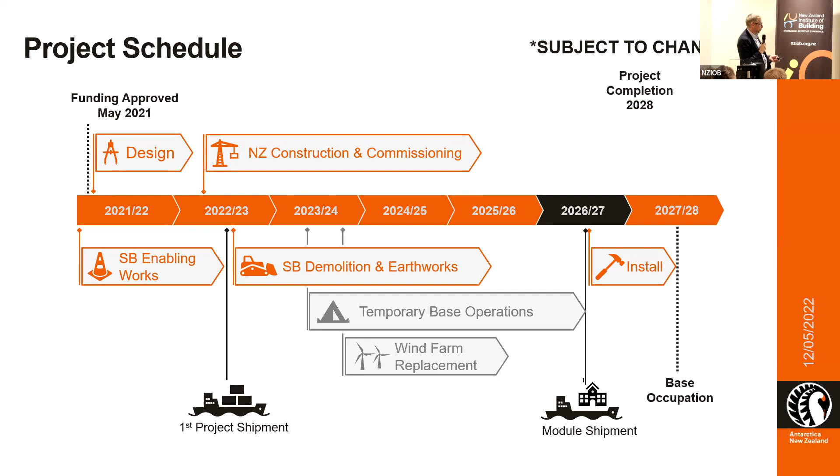There's a fantastic blue, and there is a fantastic orange, very akin to the dark orange you see on the heritage hut there as well. And there'll be a chance to have your say over the next month or so. So spread the word and look for the campaign, but it's going to be a fantastic way to engage with what we do. And that is probably enough. And we'll be very happy to try and field any questions, not too tricky, please.

Sorry, at the back. Hi. Yeah, how long does it take to go from Timaru to Scott Base? So for the ship journey from Timaru down to Scott Base, again, it depends on the weather. And so we've got a shipping window. Yeah, so 8.5 days is the steaming time if you get good weather in a straight line. Right. So we've allowed quite a bit more than that.

And the captain obviously makes the call on the design. So the vessel voyage is dominated by the design limit state, so the structural design. So the captain has the call on when he leaves. And yes, so it fits within our window. So we have a fixed window with Big Lift to load, sail, and then unload, and then they're off to the next job. So we've had to plan that duration very carefully to make sure we've got enough time. Great question. So it's slightly variable, and we're hoping it to be as short as possible and as cheap as possible.

We've got a yes. Thanks. Yeah, sorry, just a question around the budget. So what's the current budget? And then maybe without divulging facts and figures, what's the split between the design component, maybe the Timaru component, maybe the shipping, and the on-site component? I guess there's a lot of other big things there, but as a percentage. I'd expect you better to rattle that off the top of your head there, Ian.